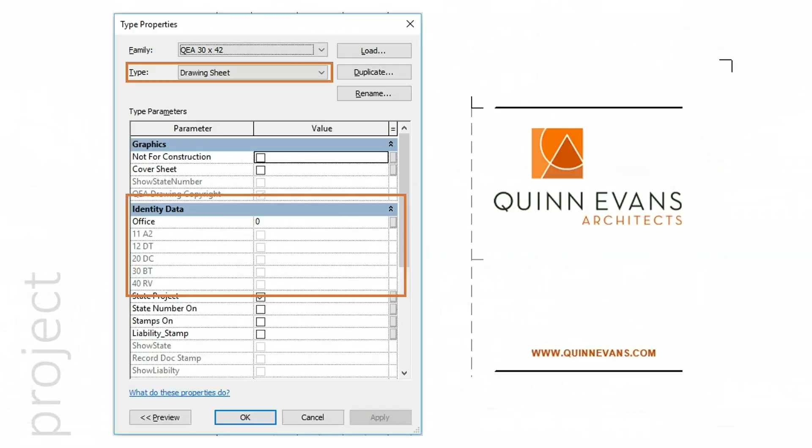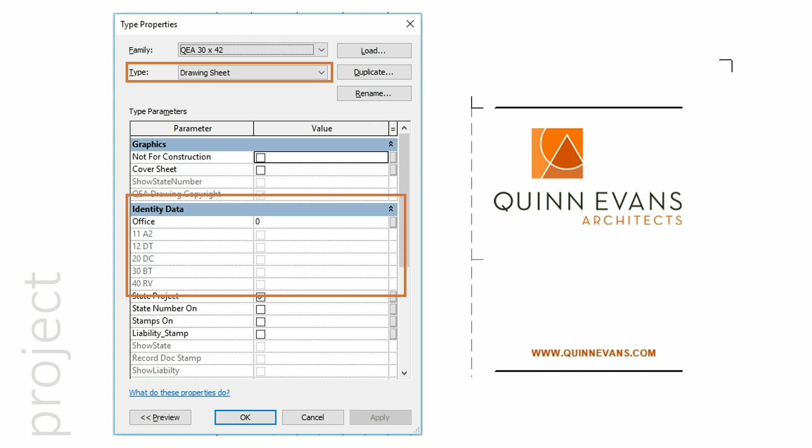Back in the project, you can see that when the user clicks on it, first he's got drawing sheet up at the top in terms of the type property. And under identity data, you can see it says office. It's got a 0 next to it, and then there are 5 cities down below it. And what we're trying to do here is create a parameter and a value that lets the user type in the address that will show up in the title block here. And so we've got more than 5 choices, which is the trick.

So this is how I've set it up. All of the addresses are there. And as you can see inside the family, all of those cities down below it, 11 Ann Arbor, 12 Detroit, 20 DC, has got a formula that says office equals and then a number. Right above that it says office with an integer, which in this case is 0. So the idea here is that you can take each of these different addresses and assign their visibility to 12 Detroit, 30 Baltimore, etc., and then use the number to dial in the proper address.

The trick here, again, is an integer. You can't use a text value. It errors out when you try to write office equals Baltimore. It doesn't know what that is. So it has to go to an integer, and that's why office has an integer. So as a result, the user within the project opens up the project parameters, and under office types in 11, and the Ann Arbor address pops up.

So what we're talking about here for good family values is parameter equals an integer. In this case, we can have addresses on title blocks, and what we're getting is more than 2 choices on visibility graphics. That's ultimately what it's coming down to. If you need more than 2 choices, how are you going to do it? This is a very quick way to be able to toggle between some of the choices that you need.

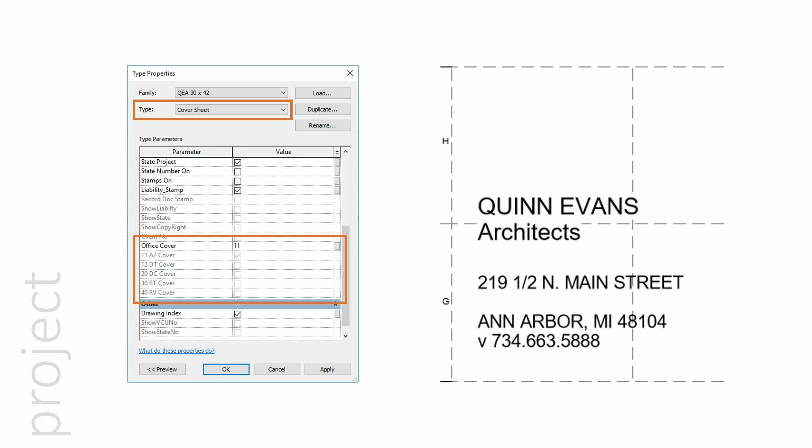Inside the family, they're all laid on top of each other for visibility reasons, but you can see the formula that I wrote basically says and cover sheet, office cover equals the number. So there's 2 things here. One is being driven by the cover sheet, which was a yes/no parameter, and then what we're telling it is that the office cover is equal to the number. But what you also see directly above it, it says office cover, and then it says equals office.

So what we're trying to do here is allow the users one opportunity to type in an address or type in a number. They get the correct address, and it now shows up in 2 places. And the other aspect is that we have a visibility control when a yes/no parameter is used. In this case, we have and parameter 1, which was our cover sheet. Parameter 2, office cover equals this number, and that's what's driving the ability for the cover sheet to give us the correct address.

The last example I want to give on the cover sheet are the stamps, and you'll see that over here on the right-hand side. We've now gone back to the project, and in our drawing sheet, we've got a stamp turned on the right-hand side. And inside the family, it might not be totally clear on this particular view, but there's multiple stamps on top of each other.

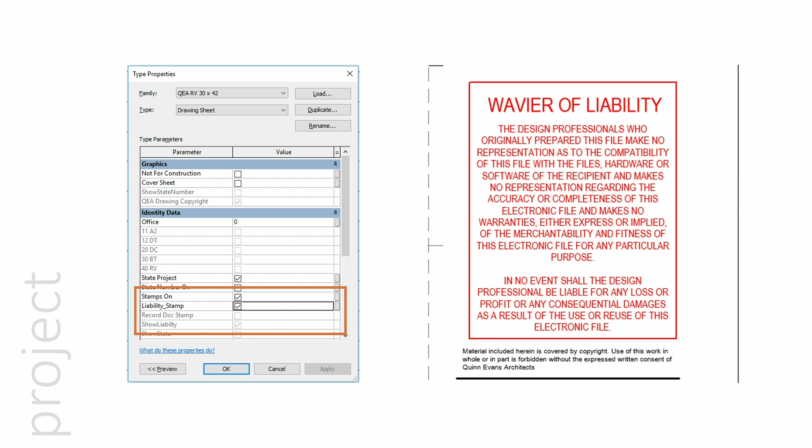Within the project, the user pulls up the type parameters and scrolls down and sees stamps on, and that's a yes/no parameter. Directly below it, that says liability stamp, and that's checked, and that's what we see on the cover sheet. And what we're doing inside the family is we are taking stamps on and liability stamp, and then we have two other parameters which are formula driven. We've got the record stamp and the show liability parameter.

With those formulas, the record drawing stamp includes the word not in the formula. So in this case, what we're trying to do is we're saying for the end user to turn on stamps, and they're either going to choose the liability stamp or they're going to uncheck it, and by default you will get the record drawing stamp.

So in this particular case, the formula includes a not variable in it, and that allows us to control a yes-no parameter in tandem with another yes-no parameter. In this case, stamps on, we're either going to get a liability stamp or we're going to get a record stamp, and that's it. We're going to see something with the checkbox of stamps on.

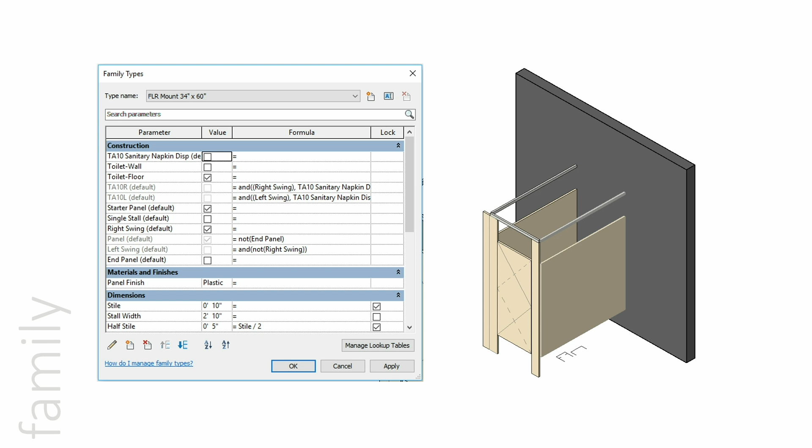Another example of this is the toilet partition family that I made, and this one's got a lot in it. In this particular case, I'm more interested in showing you guys the fact that from a user point of view, you can see again how this not parameter is being used.

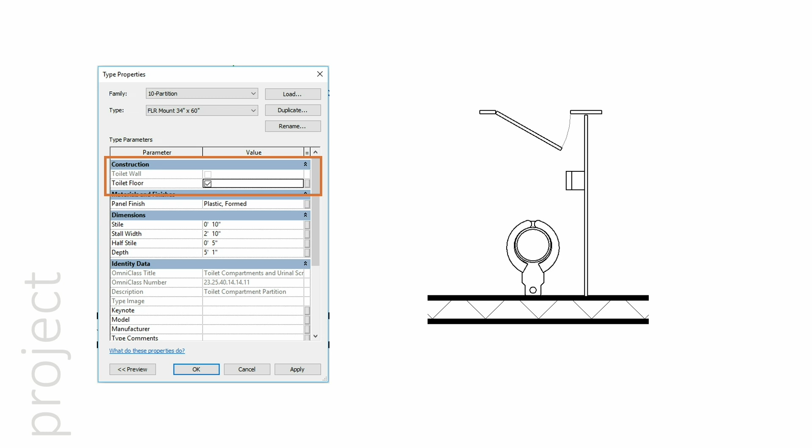We either have toilet floor or toilet wall. We get toilet wall, toilet floor. So they're going to see a toilet no matter what. As a type parameter, they have to choose which one it's going to be for that family. Within the actual family, the way it all breaks down is, again, just using that not variable to make sure that we're seeing one or the other.

I shared this with some other folks in the office, and there was quite a few light bulb moments when they realized they didn't necessarily need to create two different types of parameters or two different project types, but just creating this as an instance parameter allowed them to then quickly toggle on and off what they needed to. They were going to see it or they weren't going to see it, and it was going to switch between the two.

The other example within the toilet partition family was leveraging the use of visibility graphics for coarse, medium, and fine. How many have used this particular dialog box and tried to leverage it in terms of visibility? Good. So in this example, toilet partitions, without doing a lot of filter control, that's what I was looking for.

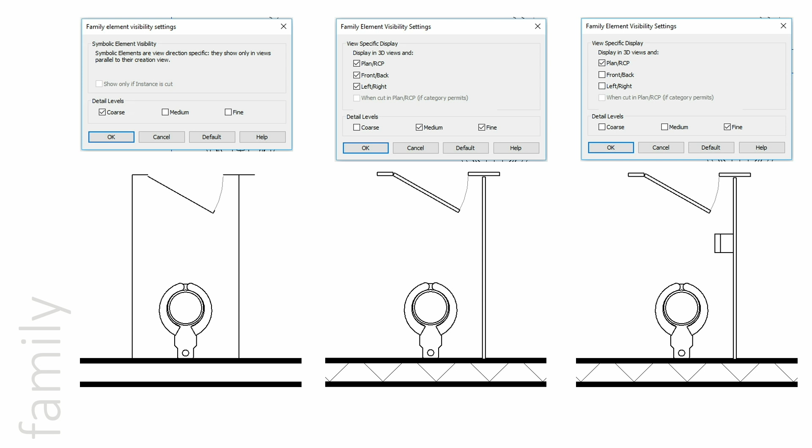Another example of coarse, medium, fine was where I used it for a fire extinguisher cabinet, and in this case I changed out the graphic at coarse to an annotation graphic, which is the green triangle. Otherwise, two things were happening in our office. One, people couldn't find them or see them at 16th scale, didn't know where they were, and two, they had a tough time, or didn't circle back and remember to tag them, in this case either FEC1 or FEC2.

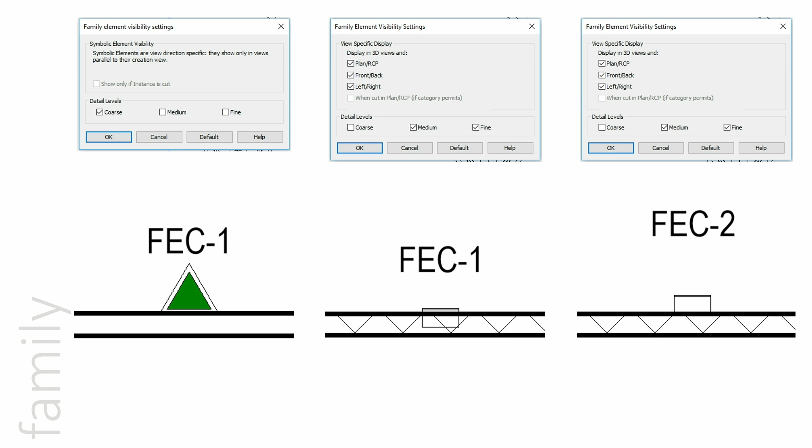So at 16th scale, there's an annotation graphic that adjusts with the scale. And then at medium and fine, you basically see what is on the middle and the right there. The other component to this particular family was that the text was added as an annotation. The annotation was scalable as well. So I have the ability to, and they're always tagged. So once you drop the fire extinguisher cabinet in, it's tagged and it's showing up correctly in the various views as you go through. The only downside to it is that

there's a reference plane just below the text that allows me to move that text farther or closer away from the fire extinguisher cabinet.

Unfortunately, it's not affected by this—it's a global setting. So at 1/8 inch, I could have it all looking really good, but at quarter scale, it might be way too close because the text got larger. So there's a bit of a balance on that particular one.

In this particular case, it was just trying to leverage coarse, medium, and fine in the family as quickly as you can, so that you weren't having to go through a lot of visibility graphics or filters to get it to look correct at various plans.

So lastly, I just wanted to run over some of those that I talked about. Parameter equals integer allows you to create visibility graphics for more than one object. In this particular case, I had 5 different things that I could toggle between depending on my views—parameter 1, parameter 2—allowing me to use multiple yes-no variables to get things to turn on and off.

So Dynamo versus Dynamo Player. Dynamo would look like this, and for those of you that are more on the guru side, everyone else thinks this looks like a spaghetti mess. But sometimes I look at this and I'm like, oh, but I like it. I know what things are connected. I know how things are flowing. But other users in my office might look at this and be like, I'm never opening that. I'm going to break something.

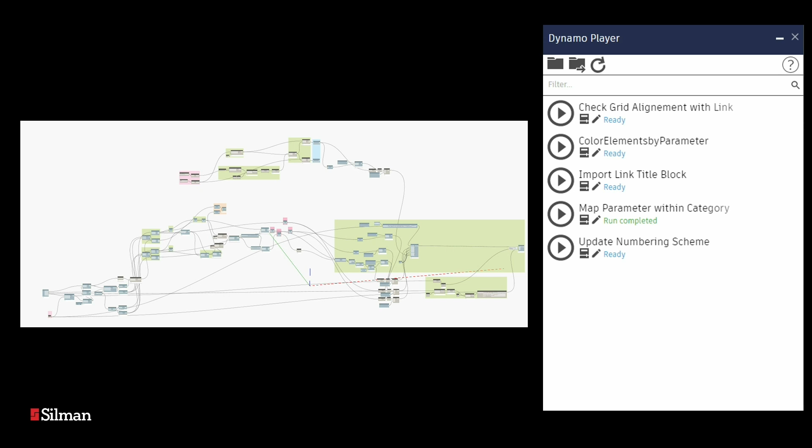It's scary. And so Dynamo Player allows for a couple of these nodes to be set as inputs. And then the user can just hit a play button, modify the inputs that they need, and the same script will run and give them the output that you're looking for. So you can build something, and then someone else can use it, but they don't have to look at this, because even if you want to get everyone to use this, you'll have less people using your tools if you stick to just using them inside of Dynamo and not starting to port them over to Dynamo Player.

It's pretty simple, though. So not everything is Dynamo Player friendly, and the biggest limitation is inputs. So I'm going to look at a couple of scripts that I've done and talk about the inputs for them to kind of get you thinking in that way. So what's a Dynamo Player-friendly process?

For example, we were working on a structure where the ceiling was curved, but the roof was faceted. And we needed to put our structure within that space. And so one of the questions we had is, okay, within that space, how much depth do you have to put your structure in there?

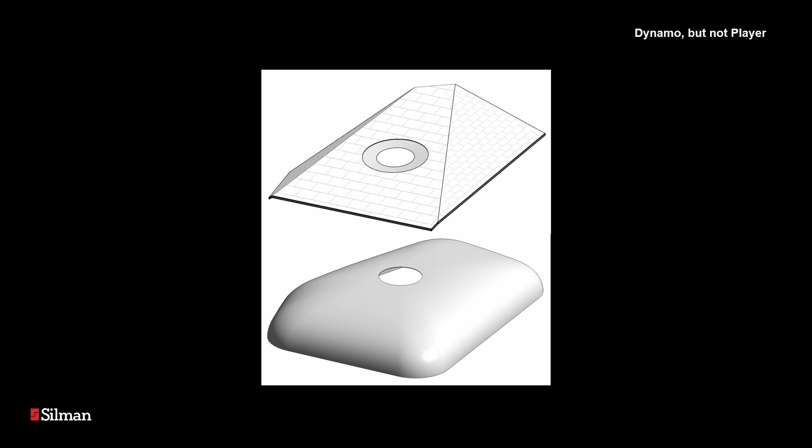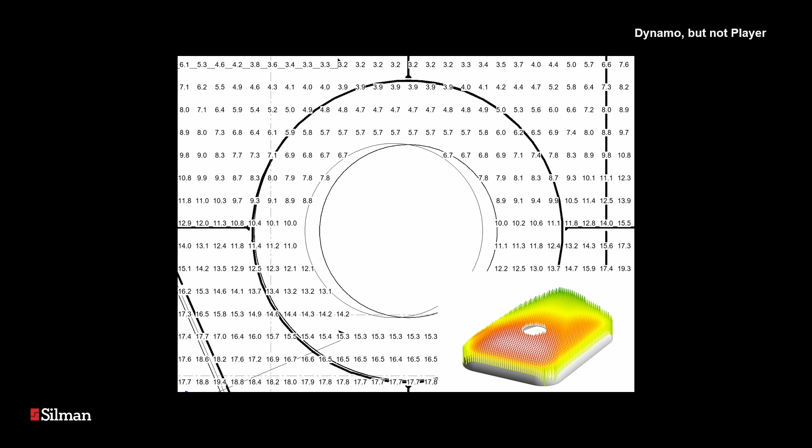And so we created a heat map like this that provided kind of space between those two surfaces. So is this good for Dynamo Player? On one hand, it's good because the inputs are inputs that Dynamo Player can use. It's basically picking an element or picking a face. Those are available. It's not so friendly for Dynamo Player because how many times am I going to be using this in my firm? Any thoughts? Maybe once, maybe twice.

Now, if it was regular coordination where on this specific project they were doing this regularly, or we knew this was something we would be doing regularly, then yeah, we could put it into Dynamo Player, make a project-specific folder, and they can run Dynamo Player just for that project in there, and then it would work. But I don't need this when I'm working on another project because they're just so different.

Another example that's on one hand a little bit better, a little bit worse, but for example, looking at load changes for a building renovation. So green shows a reduction in load, so those columns and footings are going to be good. Red shows an increase in load, so those need to be reviewed. So something like this, on one hand, it's easier for Dynamo Player or it's better for Dynamo Player because it might be repeatable between projects, but the inputs on it are a little bit less clear.

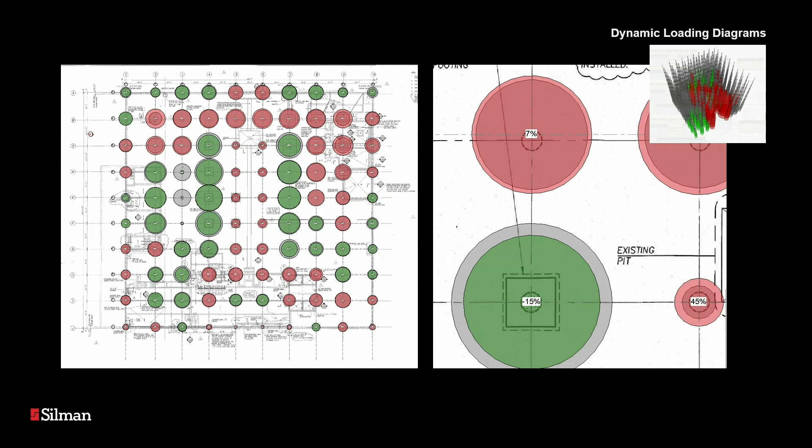It's a little harder to say what the inputs are here, so I'm going to say this is not a good Dynamo Player application. But a third one here, this would be a good application. So for example, looking at something and trying to understand a parameter, but visualizing it, right? So when you're back-checking, when you're looking at something, and you want to know, okay, in my slab, what are the thicknesses of my slabs around this plan?

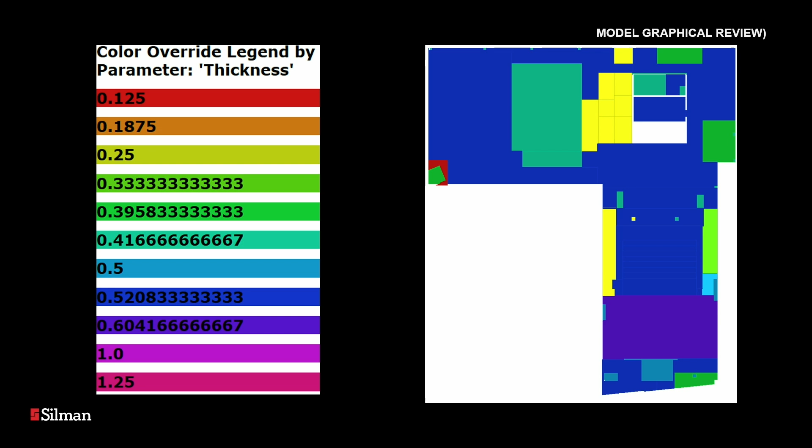And so we can visualize the color just by reading a parameter and then coloring it by that parameter. So the input for this would be just the thickness of the element. But the thickness of the element isn't actually the input. The input is just the elements and what parameter to look at. So the inputs are totally feasible to be in the selection that Dynamo Player allows for.

And then the script, and I'm not focusing on the scripts that you could do in Dynamo. That's a whole other presentation we could be doing. This is specifically on Dynamo Player and how to take scripts that you may have already and port them over. So another one, a little bit more complex. You may have seen this one before.

As I presented, but looking at grids between two models, we have the coordination monitoring, right, copy monitor. And that works sometimes, but if you make a new grid, it's not going to tell you, oh, there was a new grid in the model. Or if someone renames a grid and then moves it, it's still thinking those two grids are connected, so it has some deficiencies.

What we have is a script that basically will create an email that says, here are your problems with your grids, and wouldn't that be nice to be able to tell all your clients, hey, here are the issues with your grids, could you fix them, instead of having to go through every single one and looking at them. So the question is here, what are the inputs? There's only one input that I need to control for this. Anybody want to think about what that input is?

Grids. It's not grids, although that is an input, but it's always grids, so I don't have to have the user change that. But what's one input that the user is going to change as they're coordinating with different links in the model? Which link? Exactly. And so that's the only input that this takes, and the rest runs and creates an email.

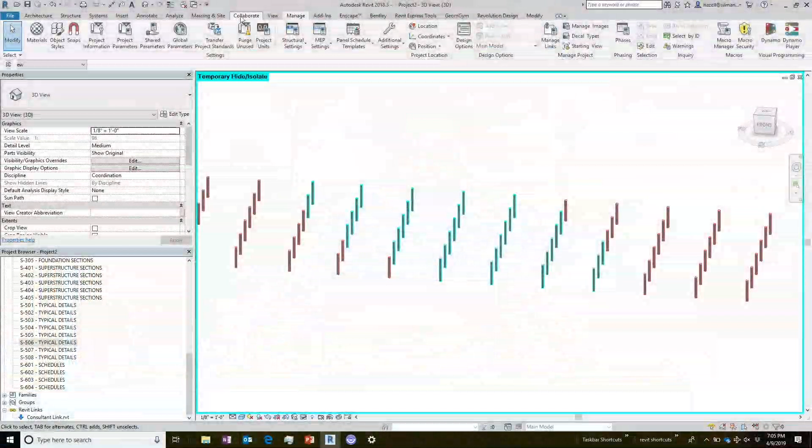So first let's look at it. Dynamo Player lives in your Revit Manage toolbar. On the right-hand side here, we've got Dynamo and right next to it is Dynamo Player. And if you're following along on your screen, you might see it better, but it's on here. So I'm going to click on Dynamo Player, and it's going to launch this.

This is Dynamo Player, and a few things to highlight in here are the very obvious play buttons, which are going to play the scripts. You can choose the folder that Dynamo Player is accessing. You can update the folder, if you change something in the folder, you can revise it. Go to the help. I don't have internet here. That'll open the help file on basics of Dynamo Player. And then a filter here, which is kind of nice.

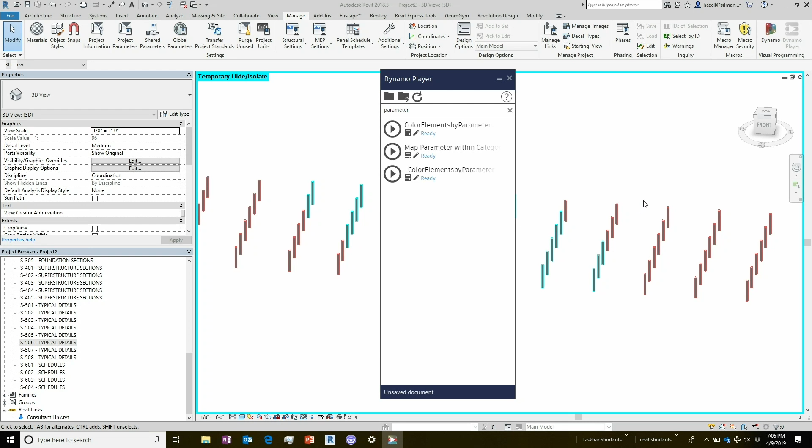So if I'm thinking I want something to do with a parameter, I could type in parameter in my list, because as you can see, and hopefully this will come with future versions, you can only get a few Dynamo scripts in here before it starts getting busy. So there are tricks you can do, like automatically remapping your folder and things like that. But at the basic level, you're going to come in here and just search. So I'm searching for a parameter. Here are some scripts that I have. Looks like it's already been run here, so I'm just going to reset this.

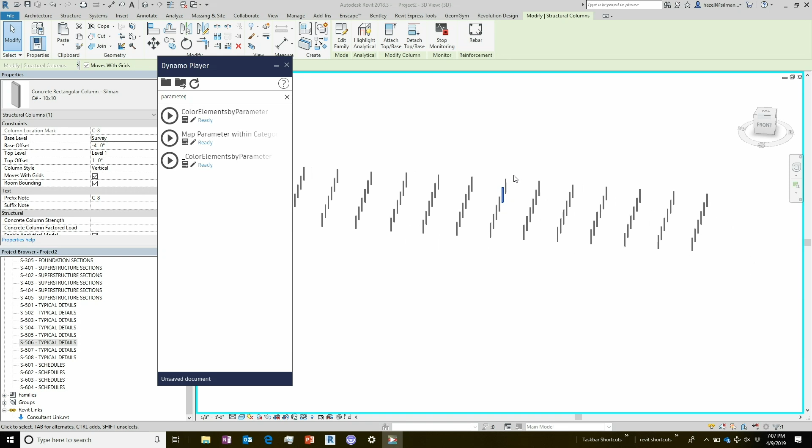So if I have these columns, for example, and I want to color the elements by a parameter, I could take these columns, and when I was looking through them, I noticed some of them, the top offset was 1 foot, and some of them, the top offset was 0 feet, and one is wrong. It needs to be 0.

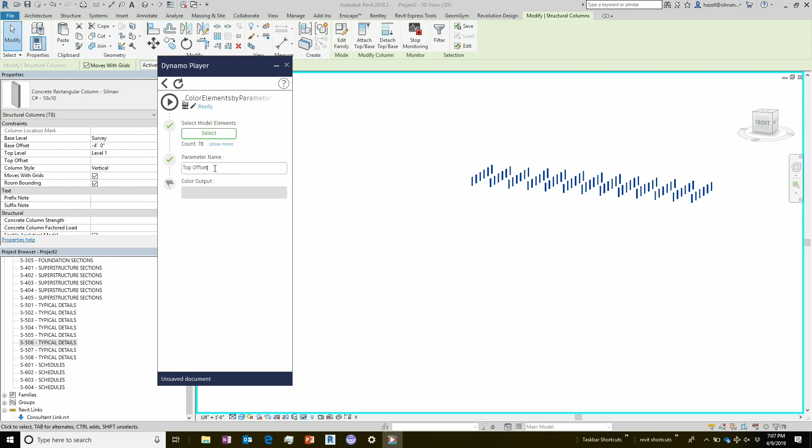So going through here, I could look at an elevation to figure out which ones they were, or, fingers crossed this works, because once you get into live demo, anything can change. Select model elements, so I can select my model elements. I can say what parameter do I want to color. So I'm going to color based on a parameter called top offset. Has to be typed in exactly the same.

I've selected these, I think already twice, and I hit play. It runs, and that's what I was worried about. They're not all equal, yeah. But this is what happens when you try to do. All right. So sorry about that.

Half of them will be blue, and half of them will be red, thus showing us which ones are 1 foot and which ones are 0. So let's look now at how to build a script, a very simple script, and then how to make it consider Dynamo Player as we're building it. So the first thing I'm going to do, I'm going to close Dynamo Player, and I'm going to open Dynamo.

And what we're going to do is we're just going to set a parameter with a string. So we're going to input a string, and we're going to set a parameter. For example, maybe on sheets, we might choose the issue date, and we might set that. So you don't have to go to every sheet and change it. So I'm going to go to New.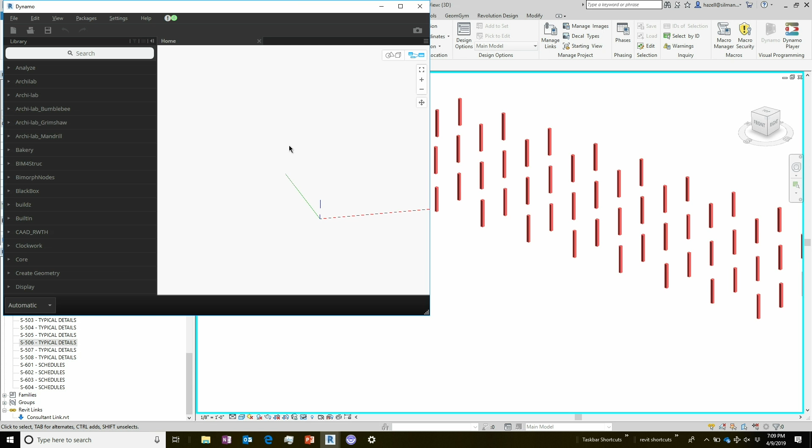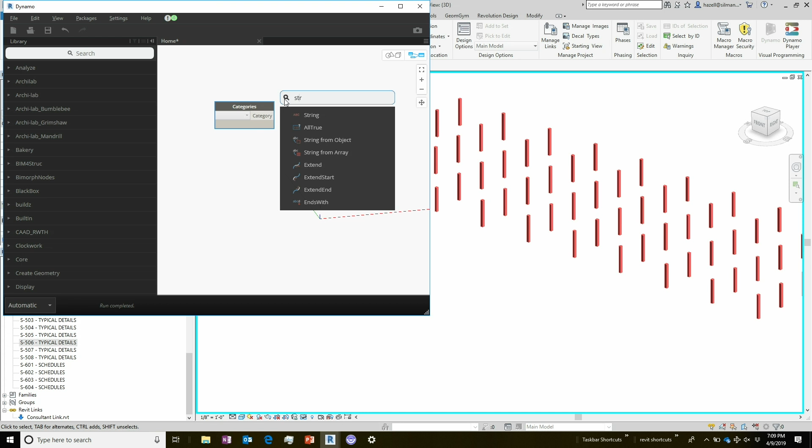So first thing I'm going to do for this is I'm going to get my category of all the sheets to start with. And then I'm going to choose a parameter that I want to put that string into. That's going to be a string. So I'm going to type the parameter in with a string, and I'm going to choose the category that I'm going to update. Can you see that? Make it a little bigger. Now I'm going to set parameter, set the parameter with the name.

So I have now the category of sheets, and I need elements. So I'm going to select all the elements of the category. There we go, all elements of category. So I feed the category into the category input, and the elements into the elements. Parameter name is going to be our string. And then our value is going to be another string. So it's about as basic as Dynamo can get.

And so now, when we look at these nodes, when we right-click, there's a drop-down that says is input. So I'm going to say yes, categories is an input, and I want to rename it to give the user information. So select the category. And then a string, and that is an input also. I'm going to rename it to say enter parameter name. And then we're going to choose just a string, so enter string or text. Because string is what I would call it, but my users are going to call it just text. So enter text. And so now I'm going to save this.

So I didn't talk about this earlier, but there's two little buttons here. The first button is edit the inputs. So if I click on that, and it kind of looks like a box and a slider. Personally, I think it needs a little bit of help to know which one is edit the inputs and which one is edit the document. So this one, you'll see here, the titles come in from what I put into Dynamo. So select the categories, enter parameter name, and enter text.

So let's, for example, go to a sheet, and what's a parameter we want to update? Let's say it's the sheet issue date. I check to make sure it's a text. I'm going to go here.

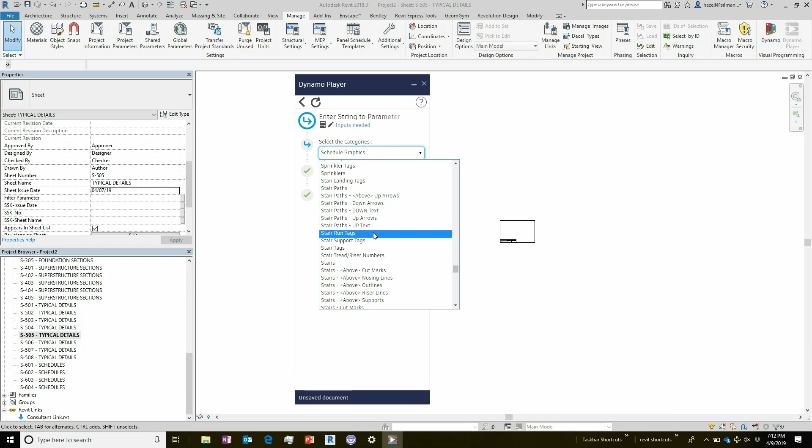I'm going to choose sheets, so it's going to apply it to all of that category, all elements in the model. Enter the parameter name, so hopefully no typos here: Sheet Issue Date. And then enter text. We'll say April 9th, 2019. And then we hit play.

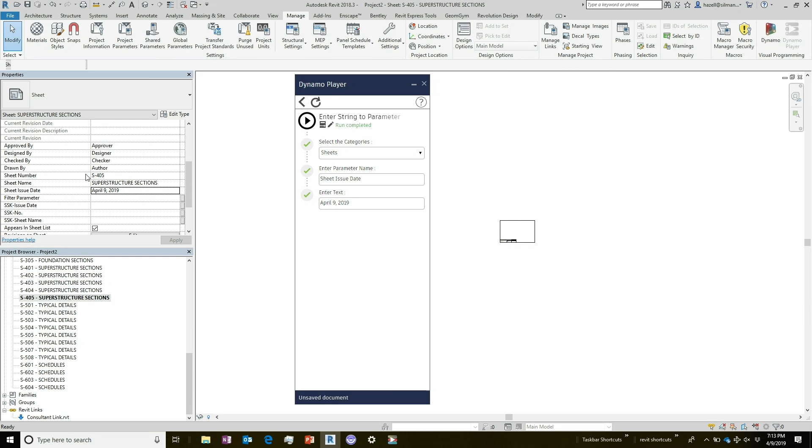And you'll notice here, April 9th, 2019 went to this sheet. I go to the other sheet. Its sheet issue date was also edited, and so on. So it took every element right away. Any user could do that. The next day it changes. They come in here and they're like, oh, we actually changed the issue date. We changed it to April 10th. Hit play. All the sheets get revised, right?

So we took a little bit of Dynamo here, but the key is we chose inputs that worked for the users. They can change them. I did use issue date. This is a beginner level, kind of for everyone level for Dynamo Player. There's two other ways you can get inputs for Dynamo Player. First is what we're doing. The second is you can actually have pop-up wizards.

So there's something called Data-Shapes, I think it's called Data-Shapes. And it will actually allow you to create your own pop-ups without a lot of coding background. You can create your own windows, and you can put drop-downs in there and text values and other information into it. And it can be a little bit more dynamic, you can control a little bit more of what the user is going to see when. And that has a lot more power. It's a lot more advanced. So I decided to keep it out of this presentation. We could do another one specifically just on that because it's a little complex.

And then the third way, which if you know how to do this, then you already know about it, is that you can create your own types of inputs and your own pop-ups within Python or C#. So any questions on just this very basic input system?

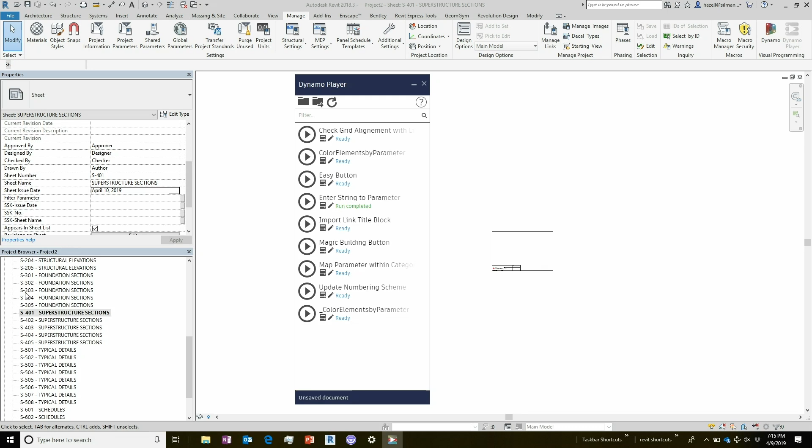All right. So let's look at a couple more scripts that you could also use in your company. For example, we're a structural engineering firm. We work with you, with your title blocks, and with your numbering systems. Yes, there's a standard numbering system in America, but everyone who's a designer has decided they're going to use a different numbering system for some different reason. So we'll oftentimes start out our project with our sheet numbers as like S-100, and then two weeks later it's like, oh, no, we're doing S1.00, and then on a different project, it's like the Wild West, right? So what I've done is we have something.

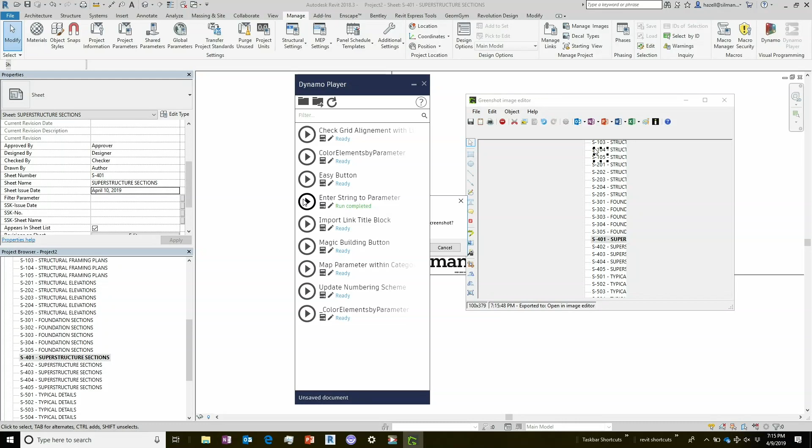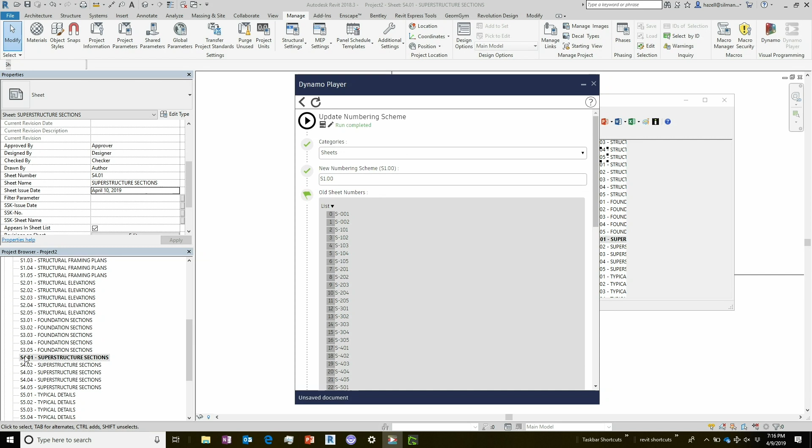So as you can see, our sheet numbers here, they're really small, but it's like S dash. See if I can make this bigger, maybe like this? No? That just centers it. So we have Update Numbering Scheme. If I go here to Update Numbering Scheme, it says, what category are you updating? Obviously, it's sheets. What's your new numbering scheme? I could go in here and type S1.00, so it's changing from dashes to dots, and I hit play. It's going to go through everything, and change it to S number dot number. And that saves a lot of time, so you're not having to go through every one and click it differently.

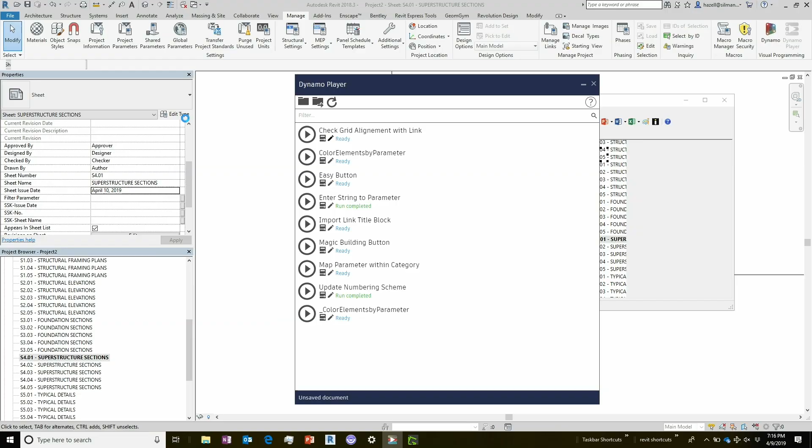And so last, I think, if you're coming up here, I'm assuming my time's getting close. So we're going to look at that grid coordination. I'm going to open the grid coordination script. I got plenty of time? All right, we've got plenty of time. Well, that's great. We have a couple better ones coming up.

So, Check Grid Alignment. While that opens up, it takes a little bit longer to open. It's got a lot of different packages, and that'll give us the opportunity to talk a little bit about packages. Dynamo Player works with packages just like every other part of Dynamo. But be warned, if you're using packages, you're using somebody else's code without really looking at it.

So what did we say about families, and probably still say, when everyone was downloading families from Revit City, right? Review them, make sure they're all good, don't bring anything bad in. It's kind of the same thing with packages, that someone should vet them. Well, maybe I can't code. Maybe I don't know how to vet them. Well, a pretty good way to vet them is if 100,000 other users on Dynamo are using them, it's probably been vetted.

But just know that those packages are very, very powerful. And so I just like to put a little bit of caution out there as people are using them. But they're great, and I use packages when I'm working in Dynamo.

So this is the script, right? I've been working on it. I know exactly how it works. I tell Jason, could you come over and whenever you need it, go ahead and run this script. And he looks at it and he goes, OK. I know Timon said pink is input. OK, but what am I supposed to do with these inputs?

But check grid alignment with link. Before I do that, I'm going to go to plan. That's not plan, of course. And I'm going to ask Dana to come up here onto this computer, not really, and I'm going to race her to see who can find the grids that are not coordinated with the architectural to see who's faster. And of course, it's a live demonstration.

So check grid alignments. I'm going to click the input. I'm doing this over and over again so that hopefully you see that it's not that scary to get things into Dynamo Player. So little word of warning: if you have Dynamo open, Dynamo Player won't run. So you have to close that. So I hit the inputs. It's now doing the same thing. It's opening the packages. It's checking what's in there. So it could take a minute or two sometimes to load.

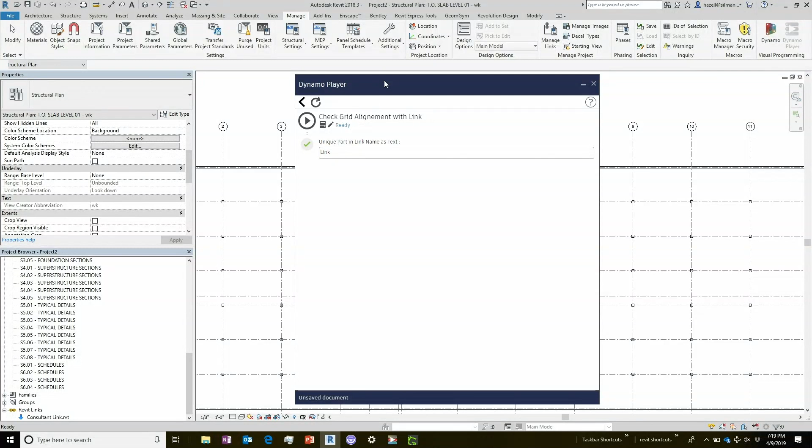But Dana, how are you doing? OK. I went over here. I looked at the link name. I see link in the name, and that's the only thing I need. Can we see the input up here? I'm going to put it to the top of the screen so everyone in the back can see that there's text there even if you can't read it. And then I hit play. And then I go to lunch, right? Oh, wait. I don't need to go to lunch. It's already run. It's finished.

And it says, the following grids exist in the Silman model, or maybe in your model, but cannot be found in the linked model. And so I could then send this email to my project manager or to our client and say, hey, are these grids important? Do you want to put them in your model or not?

Or more importantly, I'm assuming most of you are architects, you can kind of help control your consultant's models, because they may be copy monitoring the links from you, so that'll tell them information, but it's not going to tell you if they create a new grid and they need it, right? Structural engineers, we need extra grids. And then the following grids are off by 1 foot.

So I'm not going to go through how I created the script. I'm more than happy to give it to Jeff so we can upload it and share it with everybody. But the thing here is that we thought about the inputs. And the only input that I needed my user to choose was a little bit of text.

So when I had Dynamo looking all crazy spaghetti, people are like, well, I don't know if I'm going to use it. But if it's one button in Dynamo Player, then they're like, oh, wait. Oh, I can coordinate my grids now? That's great. I'm just going to keep doing that.

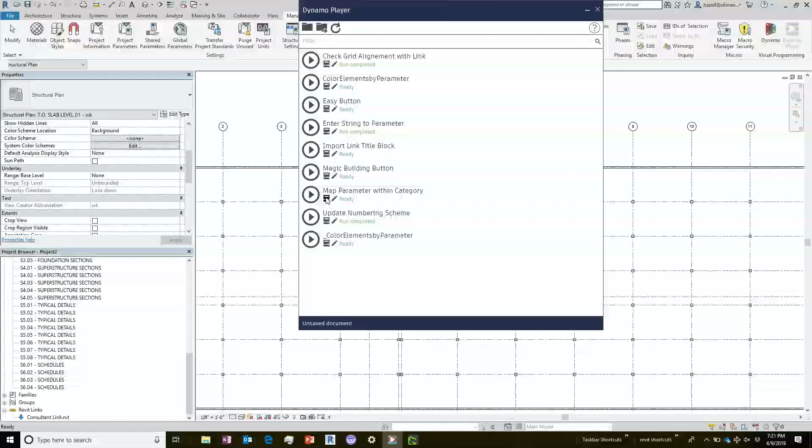So some other things that are in here are, for example, how can you map one parameter to another parameter? I think I've seen presentations here that use that for other purposes. And what if you could map any parameter to any parameter, right? So we did it earlier manually with just a string. But what if I went into here and I said, where is it? Map parameter within category. So the input that I gave the user is a category. So let's choose sheets.

And then category, or it says category. It's wrong. It's the parameter with the info. So what parameter has the info? Let's go choose, for example, a column. So I have a column location mark here, B-2. And let's say I need that for another reason somewhere else, and it's actually not something I can put in my schedule, right? I can't filter my schedules. It can work with the graphical column schedule, but not with another schedule.

So let's say I need to put it over to comments. I'm not recommending this. I'm just showing this as an example of moving a parameter from one to another. So I'm going to go here and say parameter to receive the info is comments. The parameter that has the info is my column location mark.

And for those of you who are in the room who are like, I'm not a structural engineer, I don't need to work with column locations, dream up another category that you might potentially need to move a parameter from one to another. Or maybe you need to multiply it by something and then put it into a value.

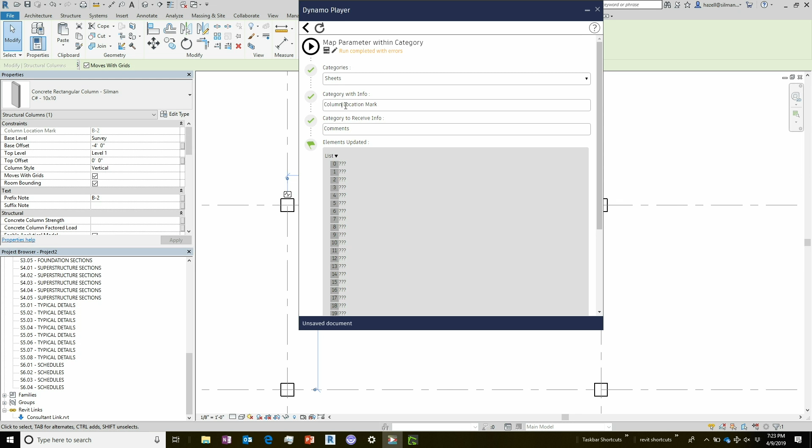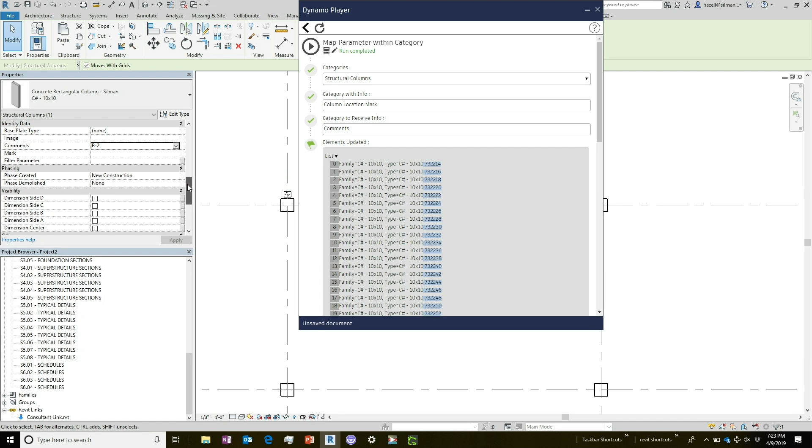So here, column location mark. So I'm going to hit play. It's going to look at all the columns. Columns, category. Thank you. Up at top. Category is set to sheets. Structural columns. So structural, if I could be alphabetical, structural columns, hit play, and it says, oh, here's the elements I just updated. I can go down here, look at the comments. There it is, B-2. And now I'm definitely getting the hint from above.

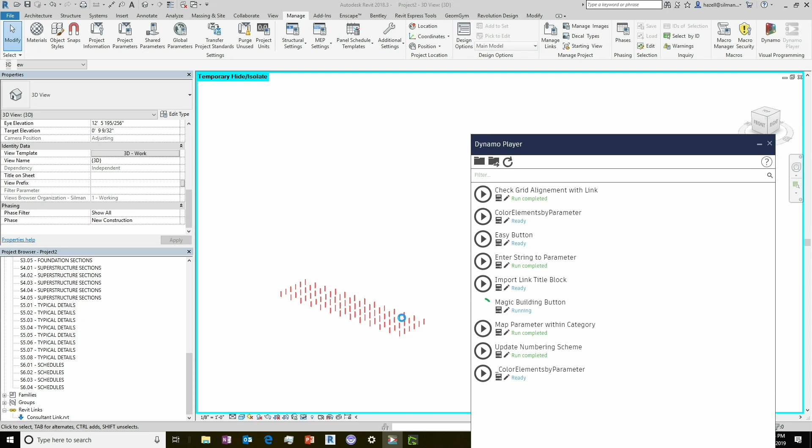So I'm going to end, hopefully, with an easy button. And wouldn't it be great if you could just hit one button and wait a little bit, and wait a little bit. It's happening live in front of you, and at no time do your fingers leave your hands. Hopefully on YouTube, this part is cut down to like 3 seconds.

Well, I think this is fascinating that you and Chris didn't coordinate your presentations, but you kind of talked about some of the same topics about how to get to the same end a different way. And I think that's fabulous because it's something everybody has to deal with, sheets. And did your easy button work? No, it didn't work. Sorry, guys. And welcome to Dynamo. This is Dynamo. Welcome to Innovation. That's right.

So last thing, I really do actually want to say Chris's presentation is important. If you're at a firm and you're working with title blocks, consider your consultants who are working with 80 title blocks. And think about how you can make your title blocks smarter, because we can really see which architectural firms understand BIM quite a bit just from looking at their title blocks. So with that, why don't we go to questions? All right. Mic drop. Any questions on any of this?

Yes. How do you control your packages? Yeah, that's a really great question. We're not doing it the best way. The best way is for your IT team to copy packages onto people's work computers, because then they have them, and it doesn't take as long to load. That's definitely the recommended way to do it. The way we do it is we have a network location, and all the packages live there. There is a known issue with Dynamo that your network location has to be a mapped drive, or it takes a day and a half to load them.

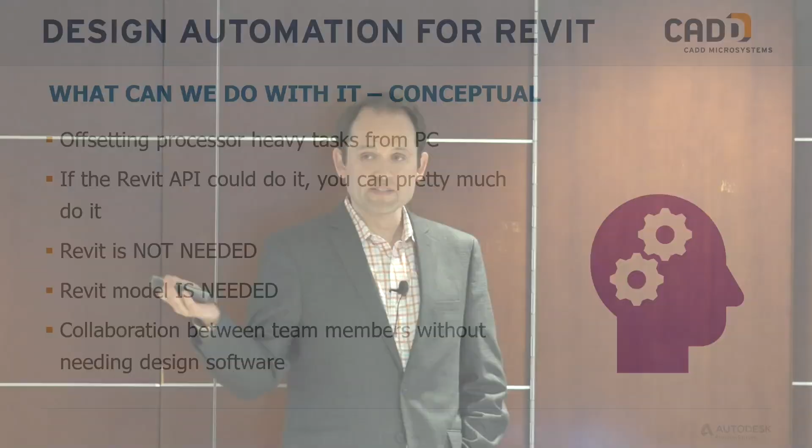What it really kind of broad strokes cracks things open into is collaboration on my design model between teams, irregardless of what software they have. It opens up this back door into my model for people who do not have Revit. Revit has a bit of a high learning curve. Everybody's a Revit user, so we all know it, we all have it, but there are certainly some people at your firm you do not want ever to open up Revit, and you do not want them to ever directly touch your model with Revit.

Some specific examples - I mentioned NerdCamp. A couple of these examples are from NerdCamp that we saw. We don't have any screenshots, it was all a little bit proprietary. One of the examples I have is actually from Twitter.

So this was a neat one - this was an online family parameter editor. The idea here, and I say idea, they had a working prototype. Somebody takes a family file, they upload it to this website. They are given then a web page of a series of parameters that they wanted injected into that family file. They are shared parameters, so my GUID's all fine and it's all there because all of the shared parameter file and everything in there is being controlled inside of Design Automation. I don't have to send out my text file and hope they connect to the right text file and get the right shared parameter file in there.

They upload the family file, they say give me all these parameters. In fact, not only that, here's a text field - start filling in these parameters on a web page. They click a button, and then a little bit of churning, and then that RFA file is sent back to them with the proper parameters and a lot of the proper data already in there. Their next step was they're going to put a bulk kind of added on. So you upload a bunch of RFA files, you click a button, they come back, all the right shared parameters are already in there, ready to go.